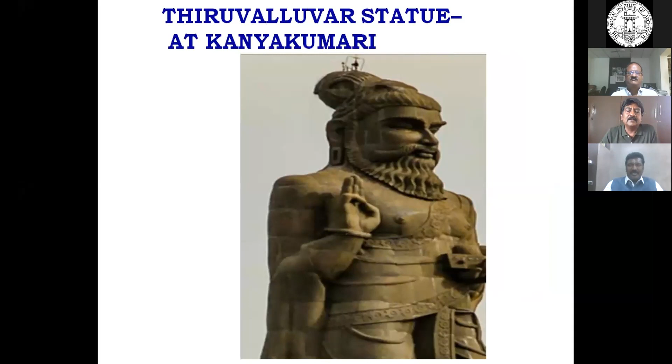Change the profile of the statue. Then only I made this statue like this and increased the cross section. And it is safe now for the past 20 years. So common sense must go together to learn, to solve any problem with mathematics. That's my idea. And there is also much tricky common sense.

When this Adiyogi Coimbatore statue came to me for checking, I thought it would also be some 112 feet. The Valluvar statue is 133 feet height. It is about 100 feet or 112 feet. I thought it would be solid, how they have erected and all, but on seeing the picture, I came to know it's only a gimmick.

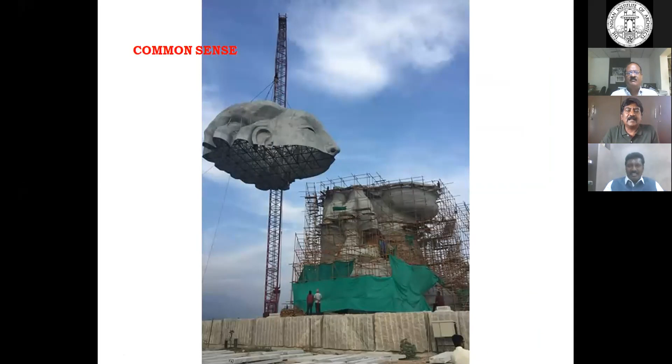So there is also innovative common sense, or I can say the common sense at the present time. So the people, the newcomers, are also very innovative to produce large structures.

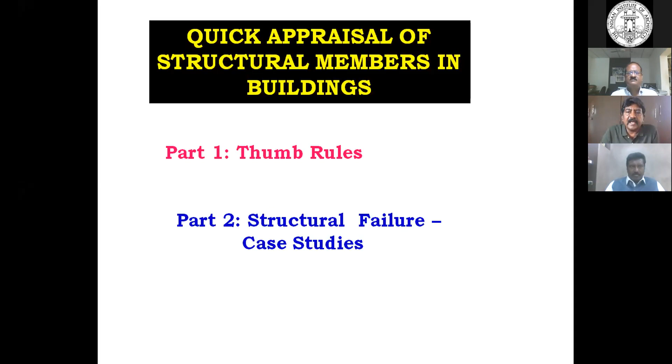Before going to the thumb rules, as I said, in a planning stage, when an architect gives the column size without understanding or without presuming the correct size, later he will feel the width of the corridor, width of the hall will become less. And recently I noticed the architect assumed a 1 foot beam, but in the basement floor, in the driveway, it became 2.5 feet, which has made the entire basement useless in the planning stage itself. So acquiring some knowledge in structural size of members is very, very useful for the architects also. With this introduction, we will go to the structural members in buildings.

Hardly we have only 4 structural members for design in our buildings: slabs, beams, columns, footings. Slabs only serve to carry the loads imposed on them: live load, dead load or furniture load. Other members are transmitting members. In fact, we need only slab. We don't want beams, columns or footings. It's not necessary from the requirement point of view, but from the load transmission point, to transfer the load from slab, we need beam. So from the slab, load goes to beam. From the beam, it goes to columns. From the columns, it goes to footing.

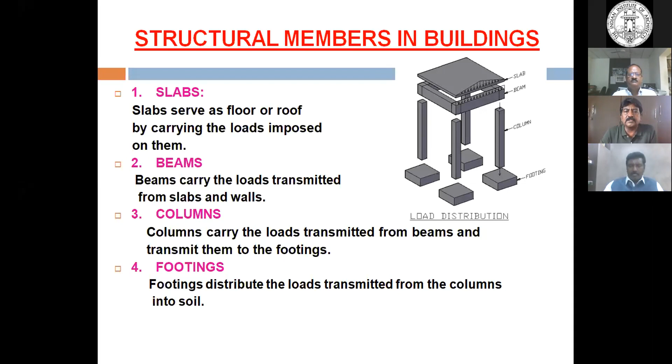Though it looks rudimentary for you, if that fellow who has done the multi-story building which failed in 2014 Chennai had an idea that the beams will be supporting brickwork, if he had the knowledge that brickwork load will go to the column through the beams only, that building would not have failed, or he could have warned the engineers at site and others to stop the work. So the knowledge of transmission of loads, even though it's rudimentary, should go to the youngsters also.

So now come to the slab size. How to achieve the slab size? So architects also study RCC designs. Studying RCC design by an architect created a problem for a young architect in this failure. He was accused that you should have provided the correct exact column size in the drawing. So you are also punishable like that.

Those things, no, that's in government. But now we made a rule book, Tamil Nadu development rules, in which we have made the responsibility of the structural sizes strictly vested with the structural engineers only. It was formed recently, and I had an opportunity to take part in the formation of that book. So, having that in mind, architects are not liable for the structural member sizes.

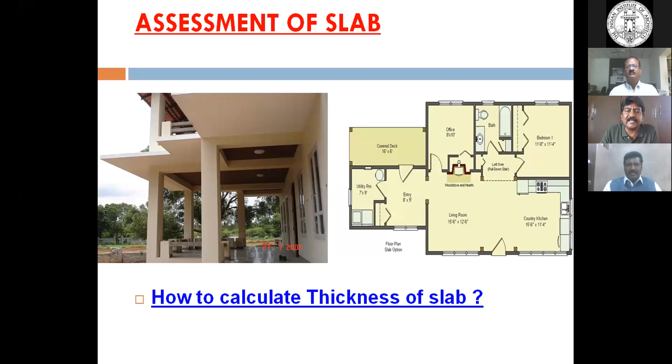We made these Tamil Nadu combined building rules now. But at that time there was no rule. So it happened that an innocent architect was taken to task for providing a column of lesser size in the architectural drawing.

Very simple, sir. How to assume slab thickness? You are going to a site, an apartment under construction, and you can verify. In mathematics, we would have learned many things: L by 20, L by 26, L by 32, modification factor, many things. Nothing is necessary. Just if Lx, the shorter span, is 5 meter, you just multiply by 3. It will give the thickness in centimeter. So the slab thickness for a hall with a short span of 5 meter will be 15 centimeter only.

If it is a 5 meter by 6 meter hall, 5 meter is the short span, so 5 into 3 will give 15 centimeter. If it is a 6 meter by 7 meter hall, 6 meter will be the short span, 6 into 3 will be 18 centimeter, 180 mm or 7 inch will be the slab thickness. So this will do wonders. Even if you do tedious calculations, at last you will end up with this result only. Just multiply the hall's short span by 3, you will get the slab thickness.

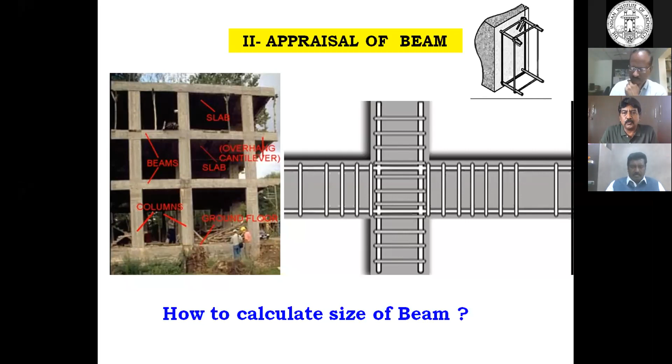But in an office building, we will provide 300 mm. It serves two purposes. For an office building the span will be large, so the requirement of reinforcement will be more, and more reinforcement bars will be needed. So we'll go for a higher width, 300 mm in office. Whereas in a residential building hall we get 16 feet or 20 feet maximum, 6 meter is the span. So for that 230 mm will be sufficient to take care of placing reinforcements. So 230 or 300 mm is the width.

Coming to the depth, depth requires a little attention. The common grade of concrete is M20. Your span is 6 meter. You just multiply by a factor of 7.5. So if you multiply 6 by 7.5, you will get 45 centimeter.

But in the field, for verification, when I go to the spot, in my mind without a calculator, I will multiply like this: 6 into 7, 42, 6 into 8, 48. So it lies somewhere in between, and 45 is the round number. So for the required beam depth for a 6 meter span, you multiply a coefficient between 7 and 8. Exactly I need 7.5, so it will vary from 42 to 48. I will suggest or verify whether 45 centimeter is there for a 6 meter span.

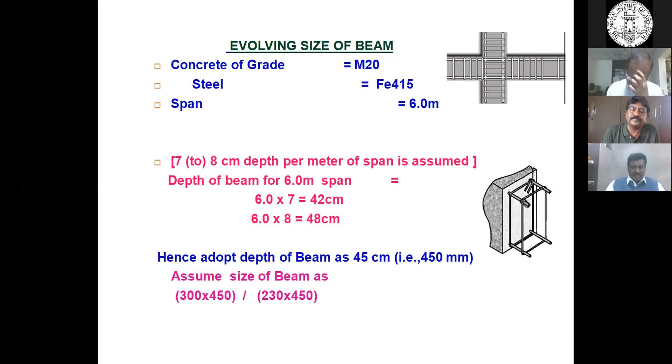So we can assume 300 by 450. So the thumb rule is you multiply the span just by 7.5. For slab, thickness is small, so multiply by 3. For beam, it's big, so multiply by 7.5. It is easy for me to give a thumb rule for flexural members like slab or beam. We call it a flexural member because it fails by bending. Bending, we call it flexure. So it's a flexural member, it fails by bending.

Whereas for a column, the predominant force is not bending, the predominant force is axial load. It is subjected to load from the beam, which compresses or pushes down the columns. So we need to calculate the load on the column. Similar to slab or beam, I cannot say for 3 meter height this is the column size, for 6 meter height this is the column size. Here, we need to know the load on the column. The size of the column depends on the load and not the span.

Because when I say beam or slab, WL square by 8, WL square by 12, L square is the dominating parameter or controlling parameter. By manipulating that span, by multiplying by 3 or 7.5, I was able to presume the slab or beam size because it depends on the bending moment, WL square, L square. But here, it depends on the load on the column. So a little attention is needed to judge the column size.

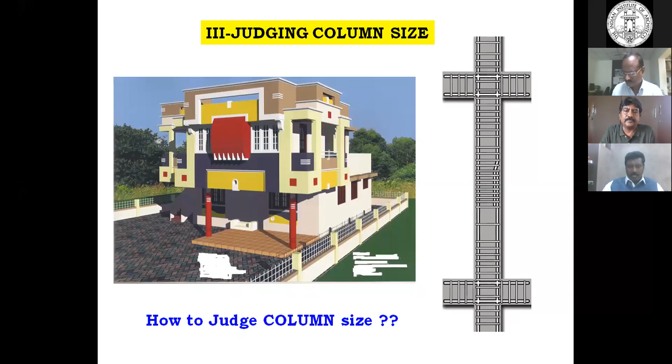Column size: before we choose a particular column size, I need to know the load on the column. So first step, we have to work out the load on the column. Second step, we have to choose a column from the table which is capable of carrying this worked out load. So these two things I will do, not that tough, but we need to understand.

We all know, when somebody asks us the price of the building or construction cost of the building at Chennai, at Tiruvanmiyur, I am going to build a house. If a friend asks us, immediately we will ask how much square feet you need. If he says 1,000, immediately we will multiply by 3,000 and say it costs about 30 lakhs, or 2,500. So some coefficient is there, some plinth area approximate rate is there.

Similar to this, when I work out the load on column in detail, I need to know what wall is coming, the density of the wall, the height of the wall, the length of the wall, how much the slab is contributing, the weight of the slab, the live load, the self weight of the column, many things I have to work out. This is how it is done in a design office. But for preliminary assumption of this size, we need some coefficients to multiply.

Those coefficients are present in the table in two columns. One is for residential building, the other one is for office building. For residential buildings also, the coefficients adopted for interior column, edge column, and corner column are different: 12, 17, 22. When I come to office building, I just increase it by 2 kilonewton because live load for residence is 2, for office it will be 3 or many times 4. So this is the live load difference between the office building and residential building.

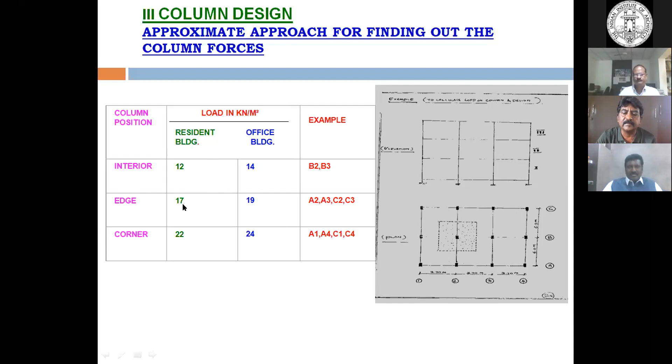So I will work out the load on a column in a very easy manner. I am going to work out the load on this column B2. This we call the influencing area for this column. So this is the span 3.7. This is 6 and 6.

So this is the difference between an architect and a structural engineer. I made 3.7 bigger than the 6. 6 must be bigger than 3.7 for appearance. So this is the difference between you and me, sir.

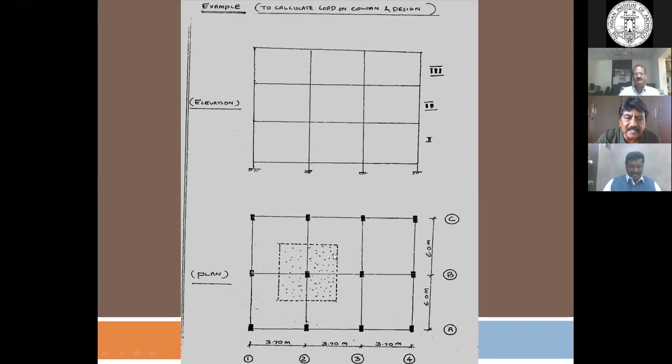So assuming this is 3.7 plus 3.7 by 2, this is 3.7. This is 6, so this is 6 by 2, 6 by 2. So the influencing area will be 3.7 into 6 for this column, like this. It works out to 22 meters square. Then this 22 meters square is the influence area. The corresponding coefficient I can multiply.

If it's an interior column, 12 is the coefficient we discussed previously. 264 is the load on the column per story. It's a 3-story building: 1, 2, 3. For 3 stories, it is 3 into 264. It becomes 792, or 800.

So though I have taken a little much time explaining this, once you conceive this concept in your mind, it is very easy for you to reproduce it. Just work out the influencing area, then take the coefficient from memory, just multiply with the calculator, and you get the load on the column. This is the first step.

Then the second step is to choose the column which is capable of carrying this load, 800 kilonewton. So I will go and see the load carrying capacity of column table. These two vertical columns give the breadth and depth of the column, 230 by 230, 230 by 600. These are capacities of the columns for various percentages of steel, because the load carrying capacity depends not only on the concrete area but also on the steel area. Provide more steel, more load carrying capacity.

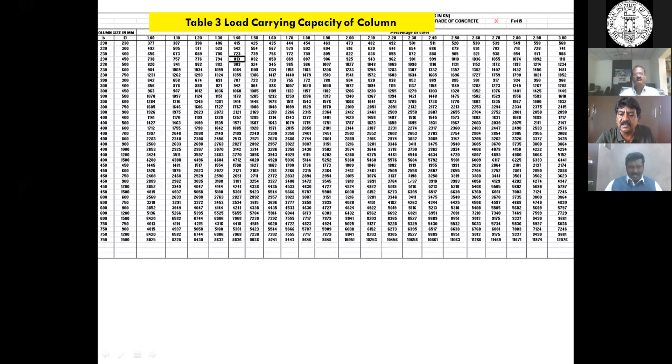So the table has been formulated to account for the size in the first two columns and also reinforcement with various percentages. It will be more clear if you look like this. I have zoomed a particular portion. See, a 300 by 300 column with 2.6% will be capable of carrying 900. But every time we cannot take these tables to site or refer the table. So I will tell you a secret.

For 2.6% steel in columns with normal M20 grade, the load carrying capacity will be nothing but the multiplication of the length and breadth. The cross section area will give you the load carrying capacity. If you multiply 30 into 30 in centimeters, it will give 900 kilonewton. It is not area, it is the load carrying capacity.

If you see 300 by 400, the load carrying capacity will be 1200 kilonewtons. If it is 300 by 500, it will be 1500. So this is the secret hidden in this table. If you provide 2.6%, the cross section area will give you the load carrying capacity of the column. So for 800 kilonewton, I am inclined to provide 300 by 300, with a little bit of increase. This will make you comfortable to provide a column of adequate size.

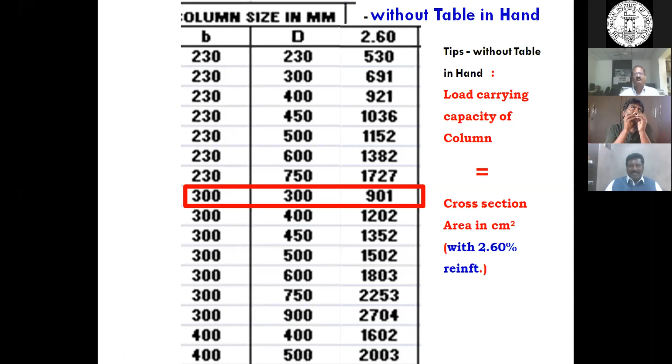A little more, we can work on the steel reinforcement also. You can see it in the PDF which I will send. One more interesting thing is which is the economical column: a smaller size column with more reinforcement, or less reinforcement with a bigger column. Which is economical?

The code book says we can go up to 4%, but for an economical column in Indian conditions, 1 to 2% reinforcement is generally economical. If you assume 2% is the reinforcement where we will be restricting, then you reduce the capacity by 10%, or mathematically, load carrying capacity of the column is equal to cross sectional area into 0.9, with 2% reinforcement.

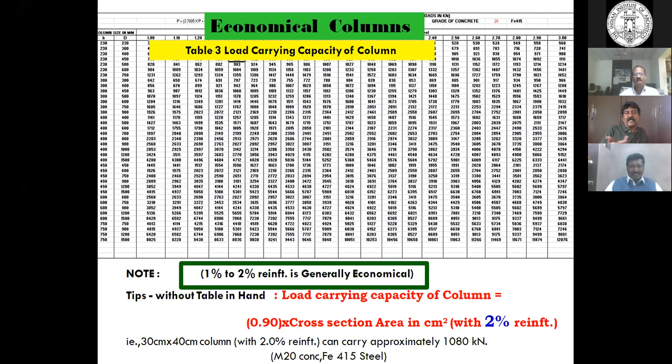So in our case, we provide 2% reinforcement; a 30 by 40 column will not give 1200 kilonewton, but 1200 into 0.9 will give 1080. So this is how I reproduce these thumb rules from my mind and check the adequacy of the columns. I hope it will be useful to you. So for 2% reinforcement, it will be 900 into 0.9, about 800. So for me, the column 300 by 300 with 2% reinforcement will be economical to carry 800 kilonewton, although I have taken a little more time explaining this concept.

Even an experienced structural engineer will not have a thumb rule in hand to check the adequacy of the column or ensure its size before doing detailed analysis. Only after doing the detailed analysis will you be able to tell the exact size.

But most engineers will have thumb rules for slabs and beams, the flexural members. Only very few structural engineers will have thumb rules like this for columns. This is my method, others may have different methods, but I can ensure this is a very simple method to assume the column size. With some coefficient, we work out the load on the column, choose such a section, and multiply with the cross section to give the load on column. This is how we can presume the column size.

Before going to the next step, I remember a story. There was a primary school teacher handling a geography class, talking about the mother planet. She explained that the mother planet is made up of Earth, so many rivers, mountains, and 7 continents like America, Antarctica, Asia, and others. After finishing the class, a shrewd boy stood up and asked, 'Madam, I am happy that our mother planet has so many mountains, rivers, continents, but what is the weight of the mother planet, the weight of the globe, madam?' That elementary school teacher didn't know the answer at that time.

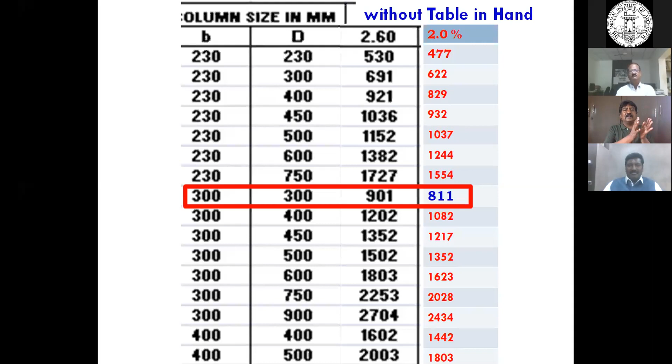Similarly, if you ask a civil engineer, structural engineer, or site engineer, they will have thumb rules for slabs and beams, but they will not have this thumb rule for columns, like the weight of the globe that Miss was not having. So I have completed the thumb rules for slabs, beams, and columns.

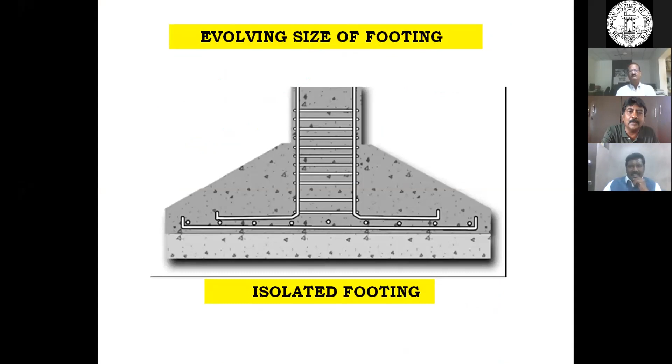Footings also like this, but architects may not be interested in what happens below the ground. Anyhow, just for knowledge purpose, I made this, as geotechnical engineers are responsible for foundations now. I was able to suggest the idea that geotechnical engineers must be empaneled or enrolled in statutory bodies to fix liability on them. But...

I can say we can assume SBC, safe bearing capacity of soil, to some extent. If it is poor soil, it will be around 10 tons or 100 kN per meter square. When you go to the site, if it has soft soil, this is the SBC, then the footing area will be bigger; you have to provide a bigger size footing. If it is coarse sand, it will be medium, around 150 kN. Hard gravel, you can assume 250. If it is some soft rock type, loose rocks and all, you can go 300. Hard rock, 500 and so on. You must have the concept: poorer the soil, bigger will be the footing size. Even a geotechnical engineer, if attending this now, will scold me for this thumb rule.

This is not right. We have to do standard penetration tests at the site and all. That's correct, but for preliminary assumption, these things hold good for us forever.

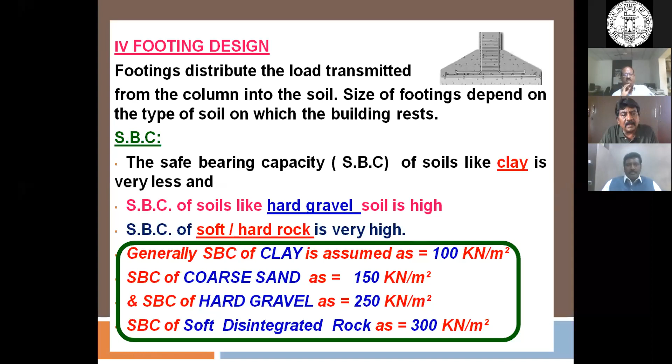So for clay it is 100, sand it is 150, 250 for hard gravel, 300 is for SDR. If you divide that load on column, which we previously calculated as 800 kilonewton, with of course 10% added for footing weight, load on soil will be 880. If it is SBC of clay, I assume 100 kilonewton, and pressure coming on the soil should be less than 100. If you provide 3 meter by 3 meter footing, 880 by 3 into 3 means 9, so it is approximately 98. You will be getting less than 100. So this is how we provide footing for the columns.

Here, calculating the load on column is sufficient to calculate the load on footing. They're just merely adding 10%. But assessing the SBC of the soil is a little difficult.

Hard clay, which appears like a good soil, if you pour water on it, will become a paste. Even a hard, rocky looking soil in Satyavedu and Sriperumbudur area, if you go there, it will look like hard gravel, but if you pour water, it crumbles into paste. It becomes powder, it becomes paste if you pour water. So when assessing the SBC, you must be a little cautious.

Generally, it's okay. Assuming 100 kilonewton for clay, 150 for coarse sand, and 200 or 250 for hard gravel soil is sufficient to know the footing size.

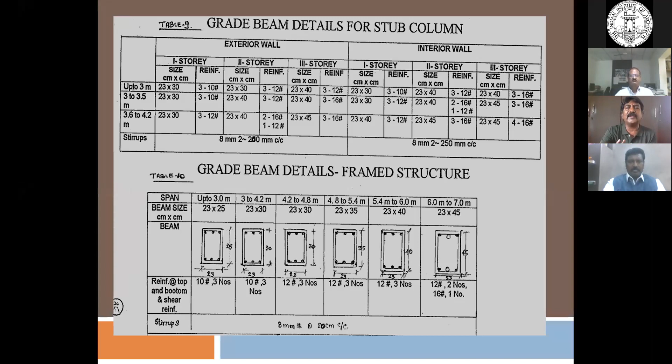I have given some tips for assuming the depth of the footings also. A lot of ready reckoners are there in the market, you can make use of them. We have also published a technical handbook, which I will send to Mr. Lohan sir and Yuvraj sir for favor of distributing. All these thumb rules will be there.

And even how to test M-sand will be there. Many things we have covered in the handbook.

As I said, civil engineering or structural engineering cannot be learned in 30 minutes, a lot of assumptions are involved. I have given these thumb rules with a lot of assumptions. For example, I have assumed only the boundary has full walls and the interior has only partition walls. Suppose if the interior also has full walls, accordingly we have to increase the coefficient. It needs a little common sense.

Similarly, for staircase and toilet portions, these coefficients need to be enhanced. Also, the bigger danger here is that the spans of beams assumed are small or moderate, because I neglected the moment. When I say column, I design the column only for the axial load. I have provided reinforcement or size, not for the moment.

Moments will be dominating or significant only in large span beams. When spans are large, then only moment will be there. So for normal residential buildings where the span is not more than 6 meters, or office buildings not more than 6 meters, these moments will not create a problem. So assuming the axial load will be sufficient, in my opinion. Hence, it is advised to use these techniques along with civil engineering knowledge and common sense.

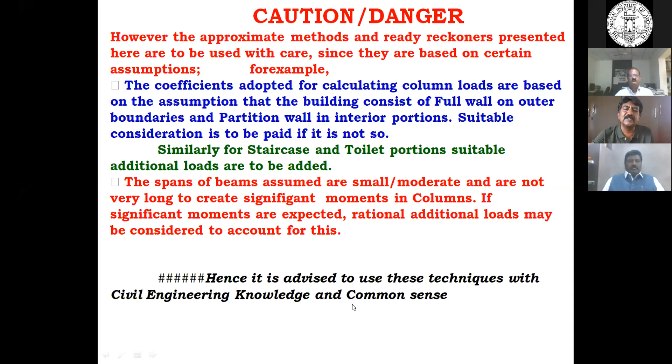Next, we are going to see the case studies. Two case studies, just 10 minutes.

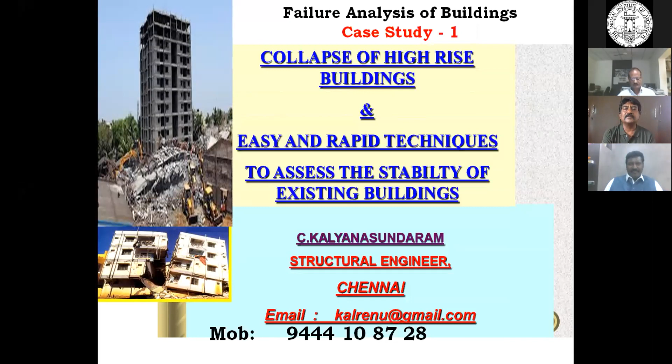The building is a very popular building which failed in 2014 in Chennai. This is the banner they had previously. It is stilt plus 11 floors, so a 12-story building. It's a banner project with two similar blocks, Tower A and Tower B.

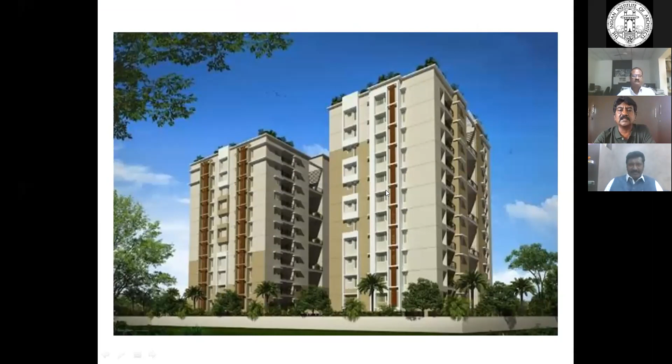And this one, which failed in 2014 — one building fell down and the other was waiting to fall. It also took much time to demolish this building, adhering to many stipulations. We will go to the technical part only.

This shows, if you go inside, you will understand why this building would have failed. We have the left wing and right wing connected by alternate ties here. So it is stilt plus 11, and this connection was so weak. While collapsing, it split into two halves, and one portion fell to the left and the other to the right, like a pancake failure.

This is the center portion. You can count 1, 2, 3, 4, 5, 6, 7, 8, 9, 10, 11, like that. Here also the same. So a vertical split occurred and it failed.

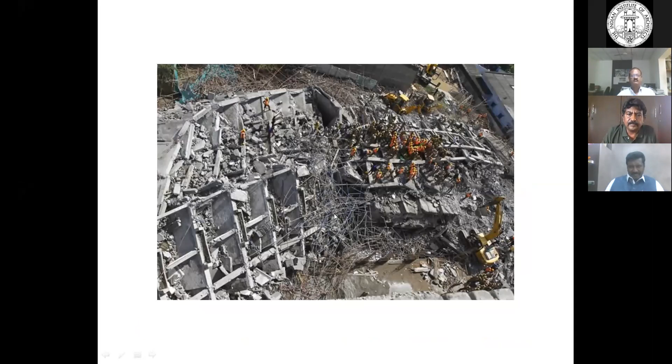After the failure, everybody ran away, and we were given this plan only. We were supposed to assess whether the failure was due to design, material strength, foundation, or many other concepts. But at that time, we had no idea at all.

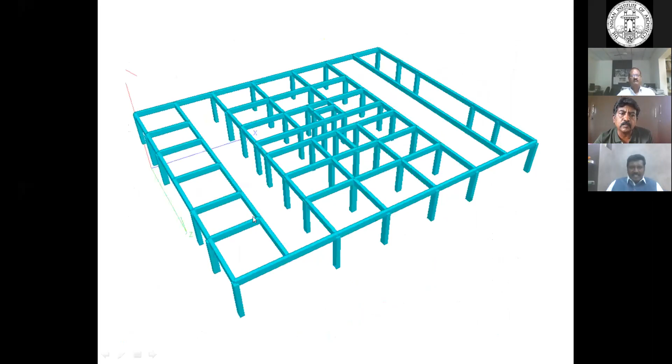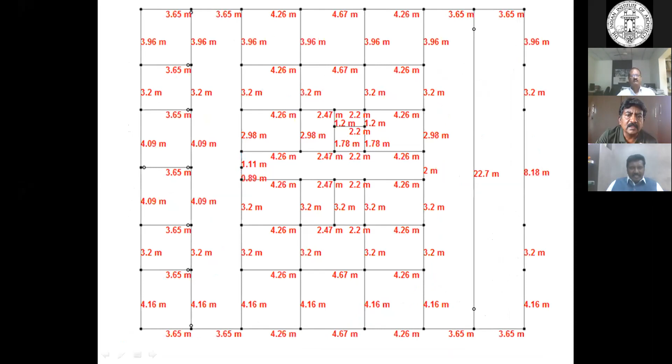This second row of columns, you must notice here, it is in the drawings, but it was not executed. These columns were in drawings only, this was not executed. These columns were not provided. In this row also, there were columns here in the drawing, like this, like this, like this. But you can observe in the site, we found there is no column here.

The reason they said, the owner has come and told it is stilt floor. It is very difficult to take the turning of vehicles, so no need of providing these columns.

He told the site engineer, who was looking like an infant child. Actually, he was a courier boy who came there quite often to give the courier to the site. One day the owner asked him, who are you? Then I am a diploma civil holder, sir, I am courier boy. Then you are appointed as a site engineer here, and he only looked after all these things. And when that fellow told no need to provide this column, yes, he adhered to his instruction.

And we checked, as a result, we have checked the size of the beam, adequacy of the beam, as well as adequacy of the columns in this figure. So previously, when the column was here, the span of the beam is only this much, this much, this much, this much.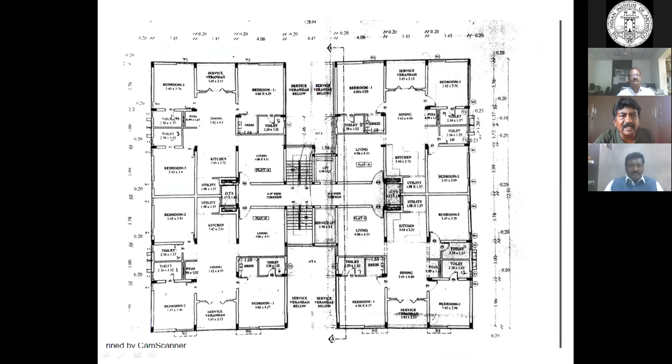Columns were there, but you mind it, walls were only up to that place. Walls here only, up to this only, up to this only. So he thought wherever walls are there, we have to provide beam. And he didn't have the concept that from the wall, load will go to the beam, from the beam it will go to the column. He was not aware of it.

Terminate the beam like this. As a result, this load on beam from the wall transmitted to this beam, and this became the biggest beam, longest beam. They made unknowingly the span of the beam like this, it is about 20 meters, unknowingly. They would have crossed like this, like this, like this. Instead, they made unknowingly this as the main beam.

And for 20 meter, our thumb rule is you just multiply by 7.5. For 20 meter, if you multiply by 7.5, 20 into 7.5, gives 1.5 meter. You need to provide about our height of beam. 1.5 meter height is the beam required as per our thumb rule, span into 7.5. But what they have provided is only 450, thinking it is spanning on the other direction, unknowingly. So this is the inadequate beam they have provided.

And coming to the columns, take this column. This is about 3.65 span, this 3.2, this is about 8 meter up to this 8 meter. So tributary area will calculate, the influencing area. This 1.6 plus 4, about 5.6 will come. If you mark like this, this will be the influencing area, which I marked for explanation. This influencing area comes around 22 meters square, here also 22 meters square. Approximately you say 20 meters square is the influencing area for this column.

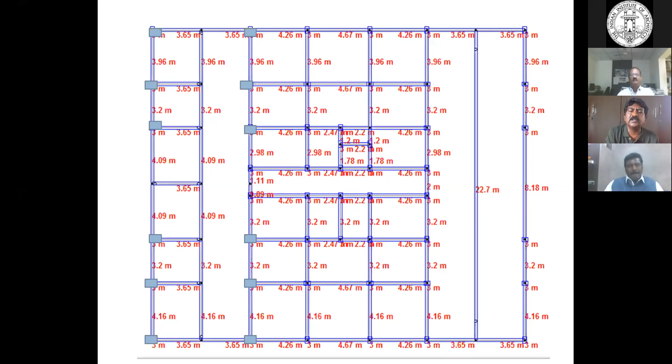So the thumb rules which we check in the building are important. Others may check the structural design or check at site level, but at least at the drawing stage, evolving stage, we should have a little bit of a check on how they are doing.

In the other building, instead of providing a column here, they have not provided a column here. They removed it from the drawing. They constructed 3 stories. But by miracle, it is a miracle how it stood for months together.

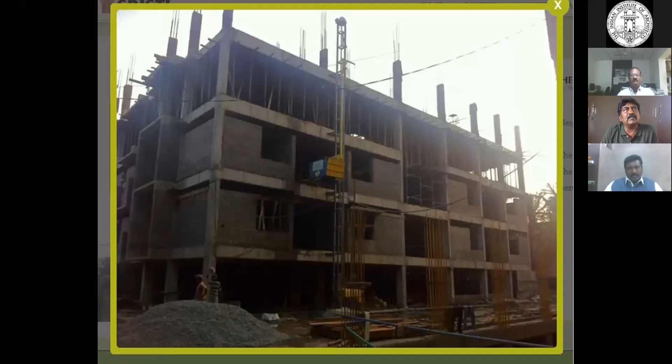No foundation. In that area, pile foundation is required up to 20 meters, more than 20 meters. But this fellow has provided only a raft, and also piles in the name of compound wall piles of about 8 feet here and there. When we excavated, we found piles here and there like compound wall piles.

If this building had not failed during construction, if he had provided sufficient column size, this building would have failed definitely because of the foundation, killing many other people. So it's God's grace that it failed during construction.

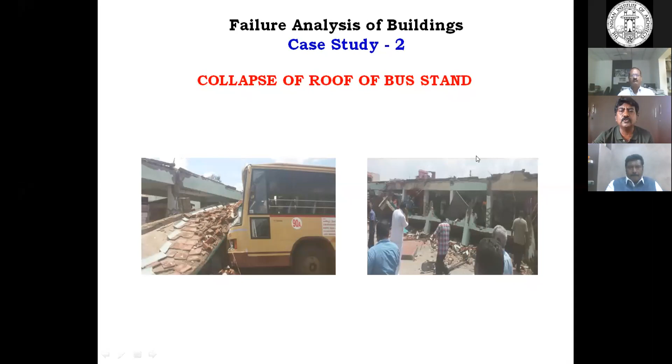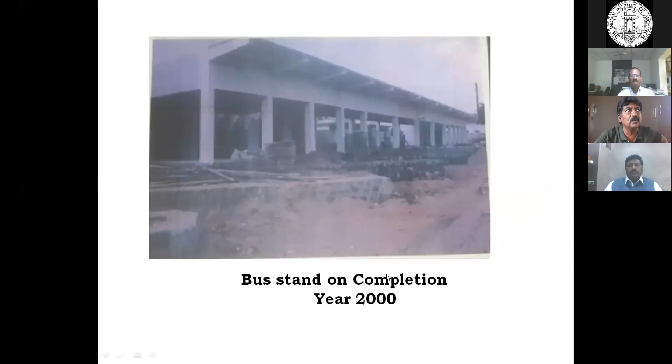This is also lack of knowledge of loading concepts. It's a cantilever projection. Already they had provided inadequate thickness because of some misassumptions. Apart from that, later in 2008 they added a parapet wall, and also they added an overhead tank.

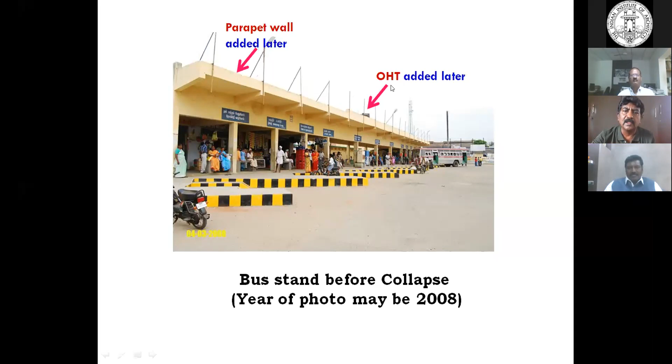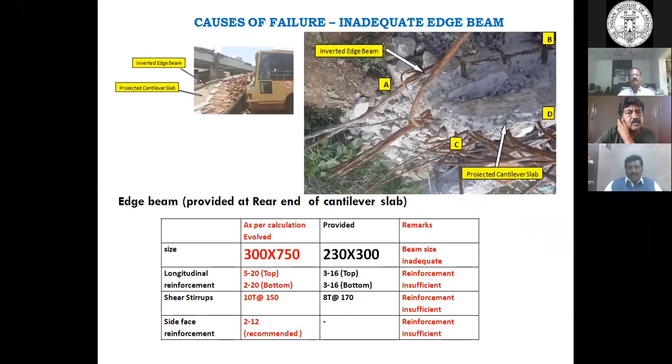Already an inadequate slab, and they provided a parapet wall at the cantilever. Cantilever structures are more vulnerable to failure. On top of that, a 2000 liter capacity overhead tank. That day it rained and there was no drainage, so all the things together made the building fail. So we must be very cautious, use common sense, and not build any additional structures without knowing.

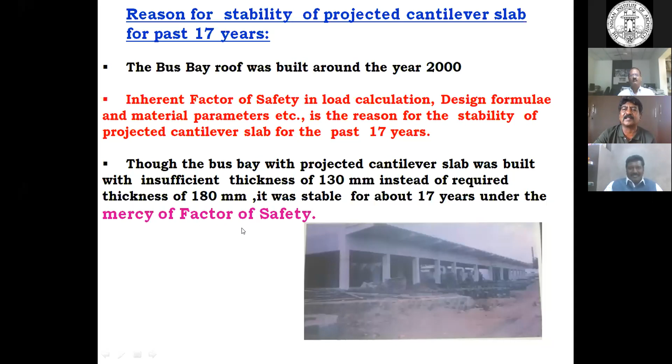But the question here is how it stood; it was built in 2000 and stood for 17 years. All bureaucrats asked me how it stood for 17 years. And I said it's mercy of God only. I concluded like this: mercy of factor of safety, nothing else. I couldn't answer them properly. First the inadequate slab, then the water tank, the parapet, then rain water stagnation.

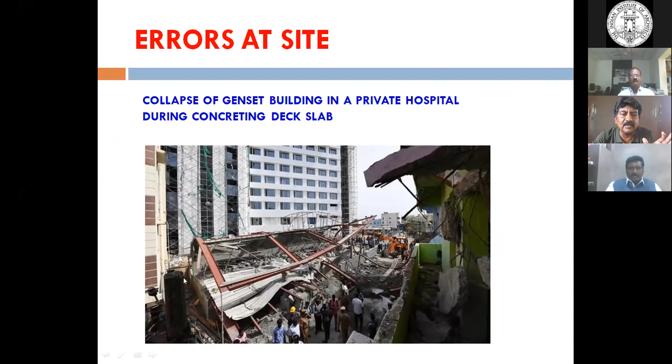Here in Perungudi, similarly, a private hospital: a simple wrong orientation of these columns. The bending direction will be in the bigger span. If the 6 meter side is there, the bigger dimension should be along the 6 meter side, and the other side should be smaller. They turned it around. That also must be taken care of.

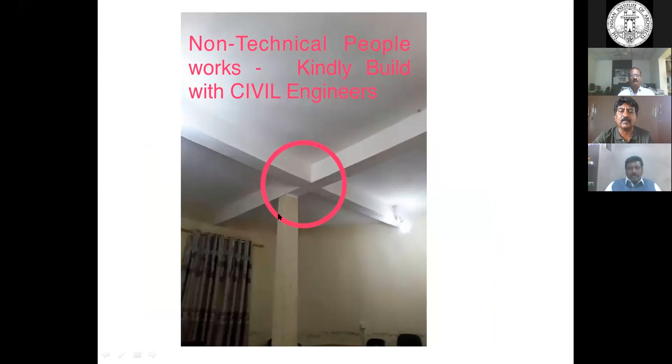Many times non-technical people do this. You see, this is what is happening inside. Where the column goes, they will put things there. This column should continue, but simply for their wiring and fans they will change it. Even for making a wire pipe go, he has broken the main rod also. They break the main rod.

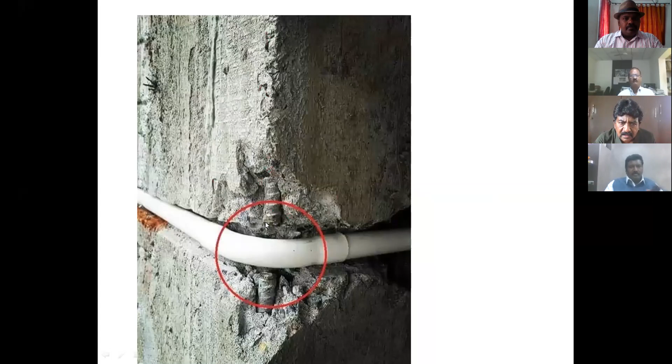இங்க பாருங்களேன், to take this accessory, the pipe line, he has broken the entire beam. Reinforcement எல்லாத்தையும் எடுத்துட்டான். So this is what happening in the site.

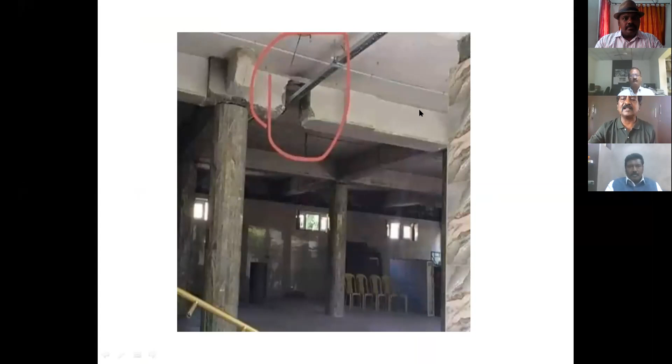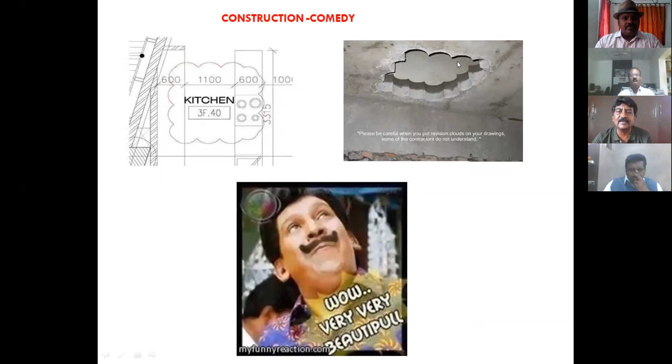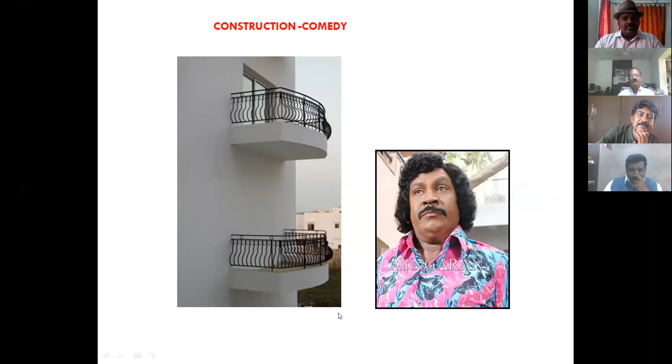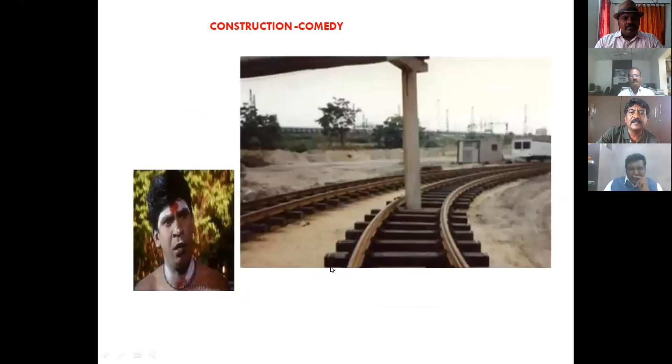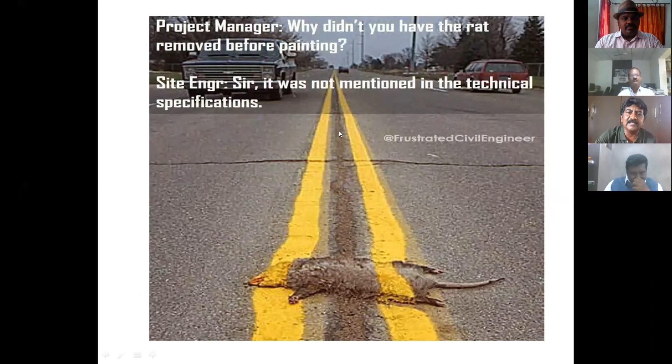So these things also, this balcony is for the road goers. So if you provide it, that fellow opens the door, he will die. This is our department, integration between our EB and PWD or highways. So this is what happening in the site. Nobody understands the concept. He said my specification only painting is there. There is no technical specification to remove the rat. You cannot remove this wardrobe.

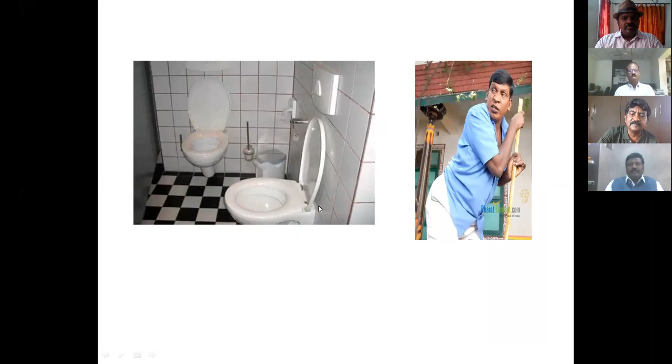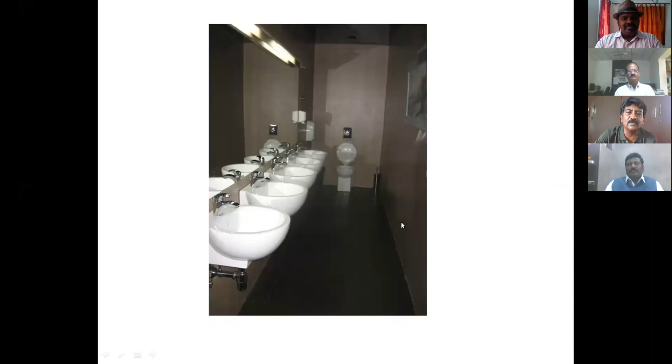So நம்ம கஷ்டப்பட்டு we are doing drawings, everything meticulously and sending to the site. Site people are not interested to carry out even the simple things with a mind. No one can use the 2 water closets at a time. Opposite also, travel பண்ற மாதிரி. See, providing both water closet and wash basin, no one can use. Only twins can use this.

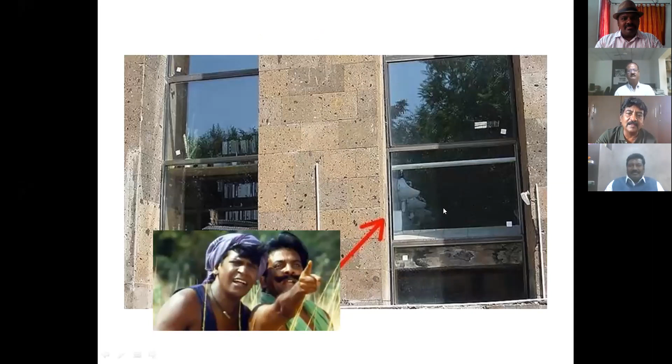It is psychologically environmental, not wasting the water, but we cannot use it. The European water closet has been made into an Indian water closet. Transparent glass they have put in a mall, which is functionless. This is the highlight of this. Instead of providing this partition down, he has put it up. So whatever pain we are taking in the drawing stage, it is not at all being done at the site.

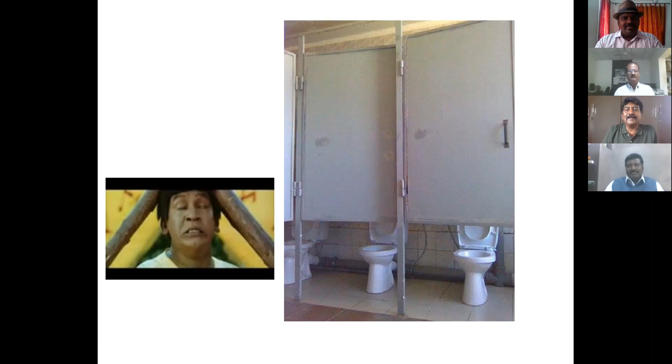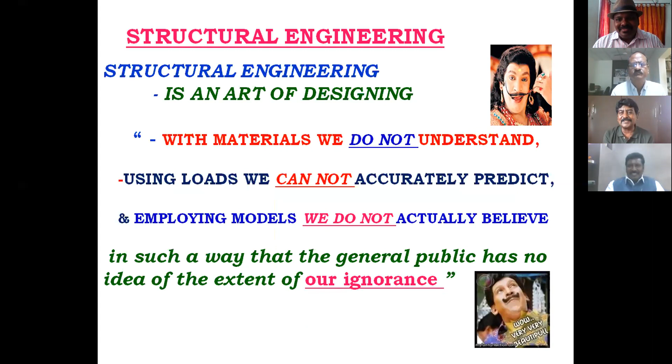And I will end up with this fun. This is the last slide. Structural engineering is an art of design with materials we don't understand, using loads we cannot accurately predict, employing models we do not actually believe, in such a way that the general public has no idea of the extent of our ignorance. With this, I'm making use of your ignorance also, and became a successful, great structural engineer.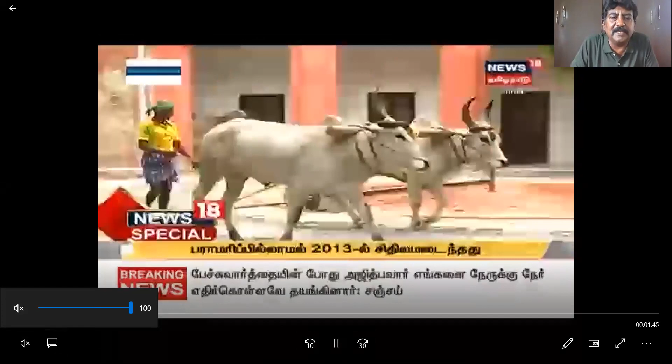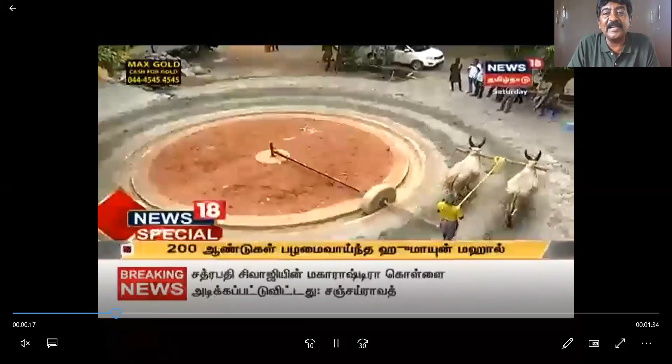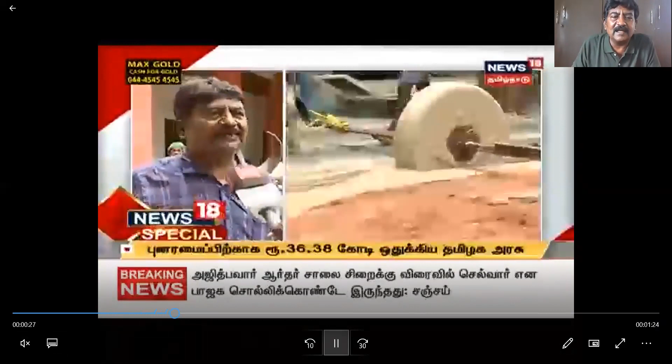This is about a 250 years old building in Chennai, located in a popular place known as Chepauk. It was built in the year 1786. The other red buildings in Chepauk, like our Victoria Hall, were built 100 years later, in the 1800s. This is the only building built in 1786. We are using only heritage materials, in the sense we use only river sand and lime, which were originally used.

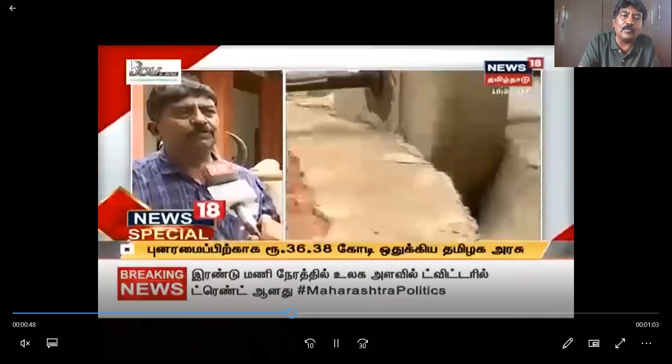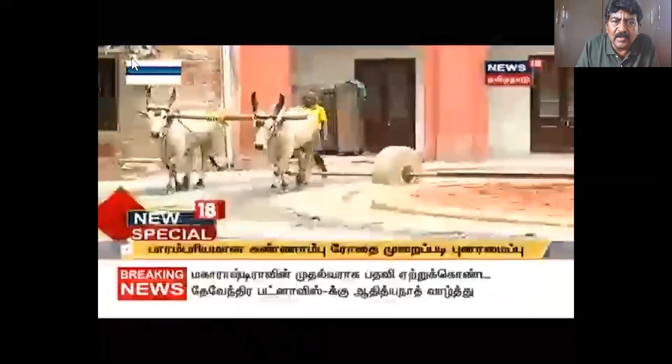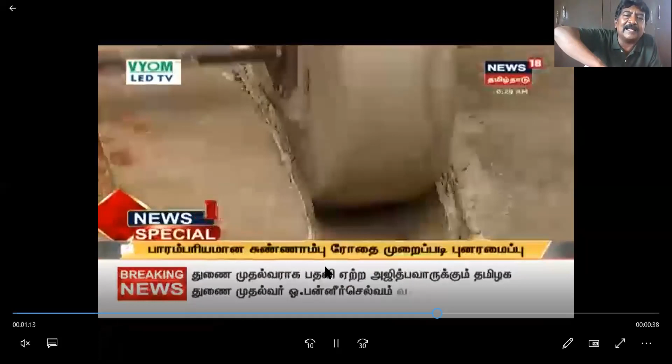We found out the source of the materials used during construction. The lime was from Tirunelveli district, a place known as Kalumalai, which has good, uncontaminated lime. We bring that lime, and we bring river sand from Thanjavur. Generally we use a grinder for mixing mortar, but we found our ancestors used this grinding roller, driven with the help of bullocks.

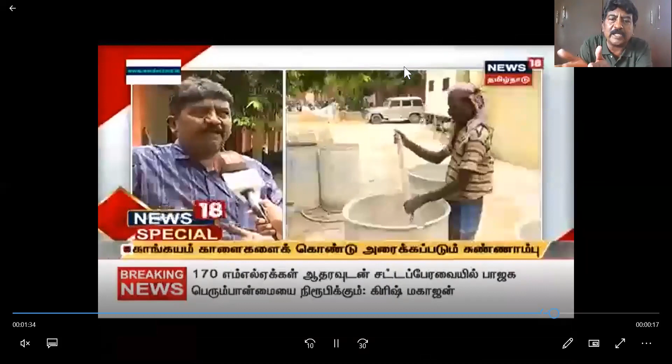And we found the lime mortar made by this roller or bullock grinding is very nice compared to the mortar made by the mixer. Because in the mixer, we only mix the lime and sand.

Whereas here, our ancestors have designed that in such a way, it grinds powder to some extent and only mixes it. In mixer or mixing using a machine, we only mix it. Whereas here, we grind it, powder it, and then mix it. It is automatically done because of that roller size. It's all well designed by our ancestors.

We copied from the old places, like churches, our temples, where these were kept abandoned. But nobody was ready to spare it to us. Everybody thought it is a holy thing. They didn't allow us even to touch it. So we took a photograph, we made a design, and we brought the stone from faraway places near Vellore, and the stones from Mahabalipuram, and we made this design copying our ancestors' design.

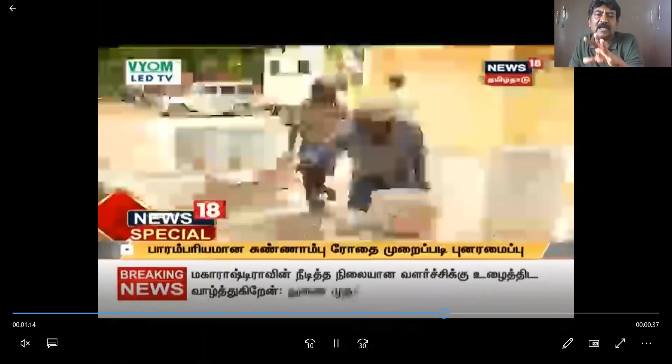And width of the things and speed of the bullocks, everything matters here. And we were able to get a more sticky, durable, very, very good mortar by using our ancestors' methods. We have tried this, and because of this corona, we sent those bullocks to their native place, and we are thinking of mixing the mortar with the same speed, we may do it in future. So we understood our ancestors are great in producing very, very durable structures like this Humayun Mahal.

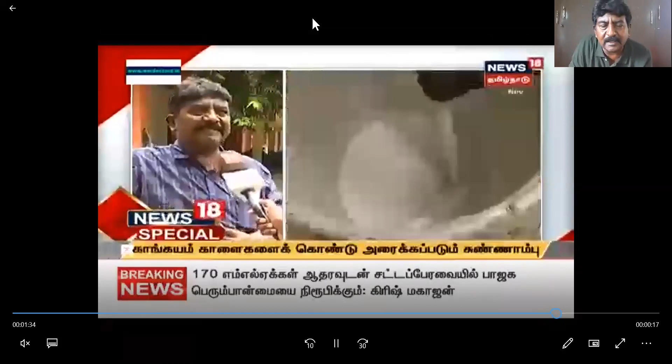So we wanted to bring all the government heritage buildings to their own glory by using the traditional material and traditional methods also. This made us use this technique in Humayun Mahal. We are planning to use this technique, of course without bullocks, with machines, in other places like Coimbatore, Salem, where there are so many heritage buildings. We are going to spread it throughout the state.

Thank you, sir. Thank you so much for the nice talk. Actually, I got the opportunity to watch the video by BBC on the same coverage, and also from one more TV. In fact, it's very informative, and you are following these materials and these techniques with the same passion that we follow. We architects are very proud that we want to follow these kinds of heritage techniques and heritage materials. The same passion you share. So we are on the same page.